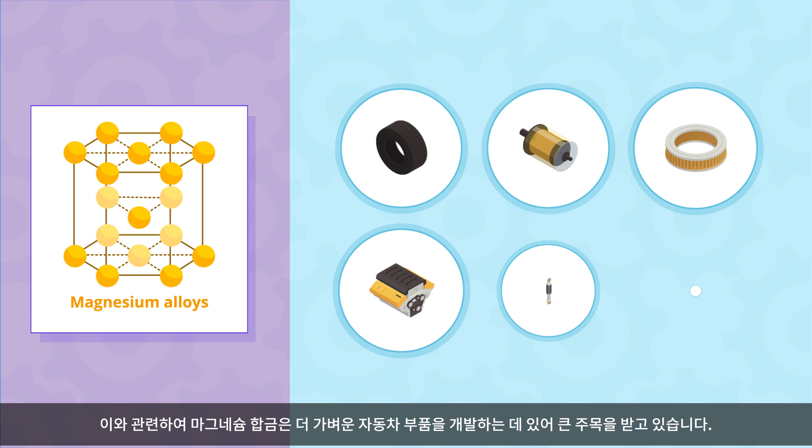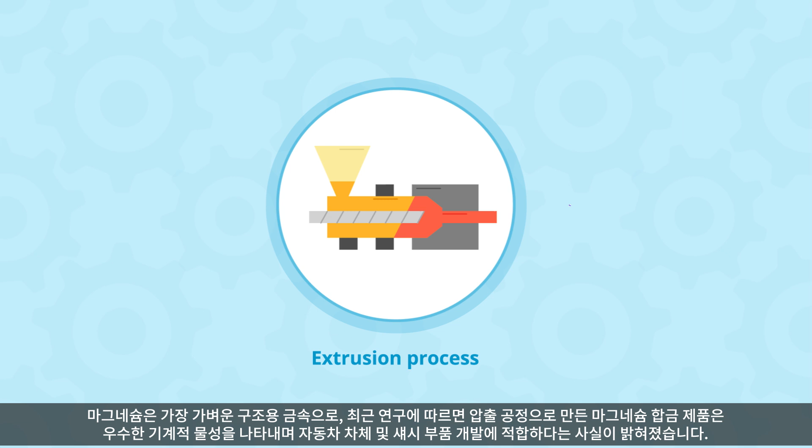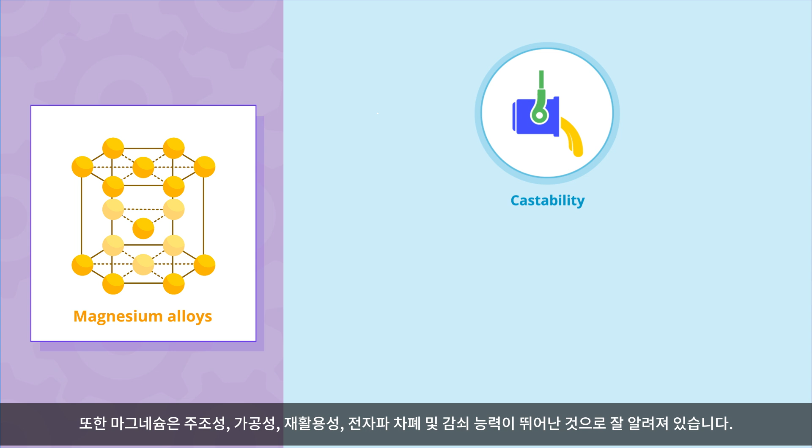In this regard, magnesium alloys have garnered significant attention for developing lighter automobile components. Magnesium is the lightest known structural metal, and recent studies have shown that magnesium alloy products made by the extrusion process exhibit excellent mechanical properties and are suitable for the development of automobile body and chassis components. Moreover, magnesium is renowned for its excellent castability, machinability, recyclability, electromagnetic shielding, and damping capacity.

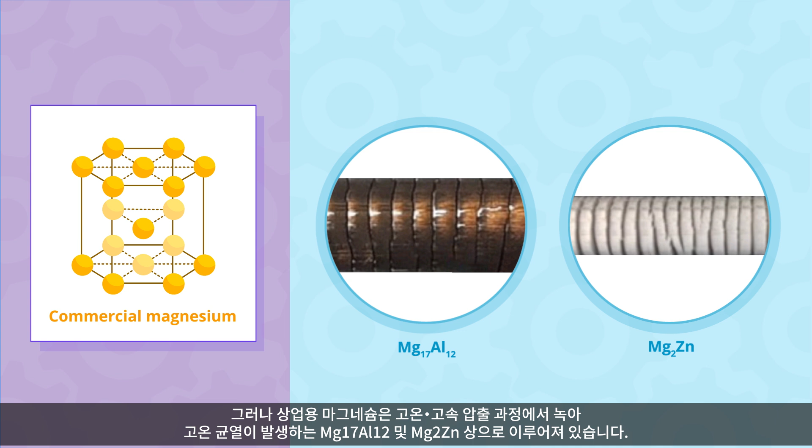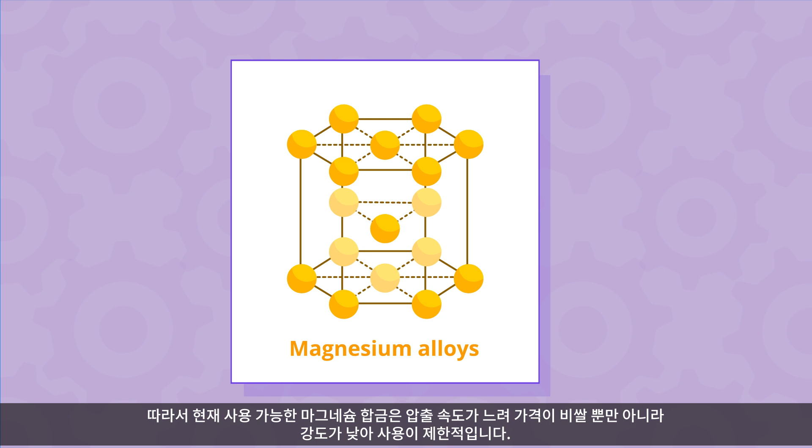However, commercial magnesium has Mg17Al12 and Mg2Zn phases, whose melting during high-temperature, high-speed extrusion leads to the formation of hot cracks. As a result, currently available magnesium alloys are not only expensive due to their slow extrusion speed, but also find limited use due to their low strength.

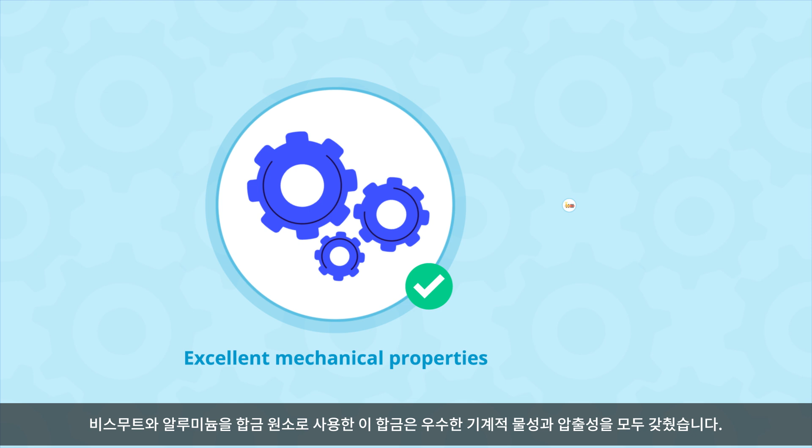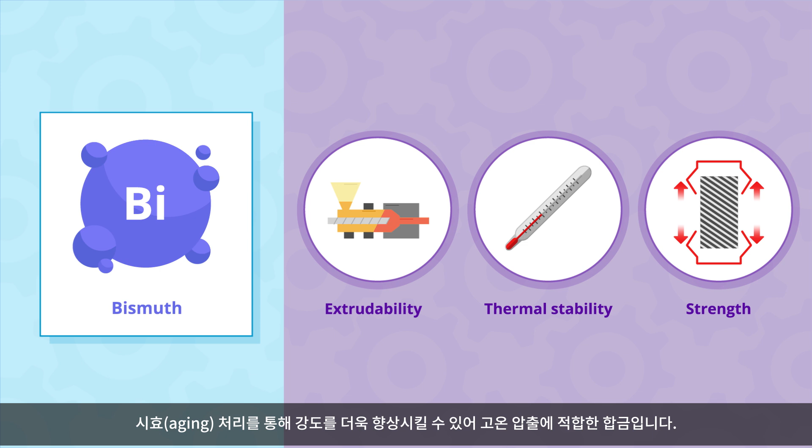To address this, researchers from Kyungpook National University Industry Academic Cooperation Foundation have presented a novel BA56 magnesium alloy. This alloy, with bismuth and aluminum as alloying elements, offers both excellent mechanical properties and extrudability. Bismuth is a key element that thermally stabilizes materials and can improve extrudability and further improve strength through aging treatment, making the alloy suitable for high-temperature extrusion.

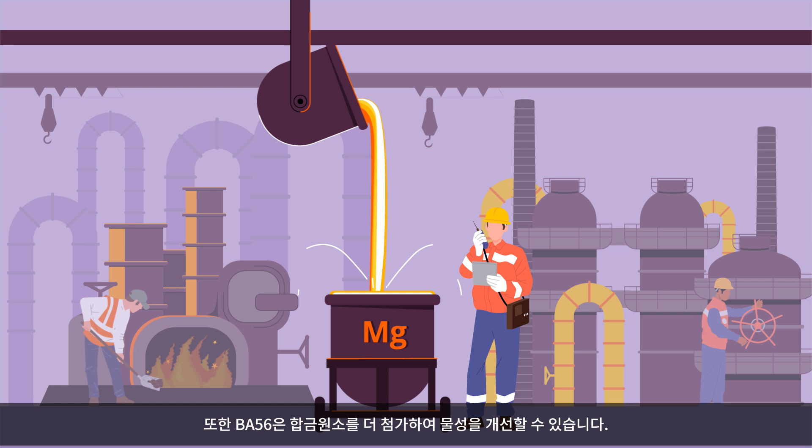Aluminum enhances the mechanical properties of magnesium alloys through solid solution strengthening. Additionally, BA56 allows the incorporation of one more alloying element to improve properties. Manganese can provide increased corrosion resistance, and zinc can further improve the mechanical strength.

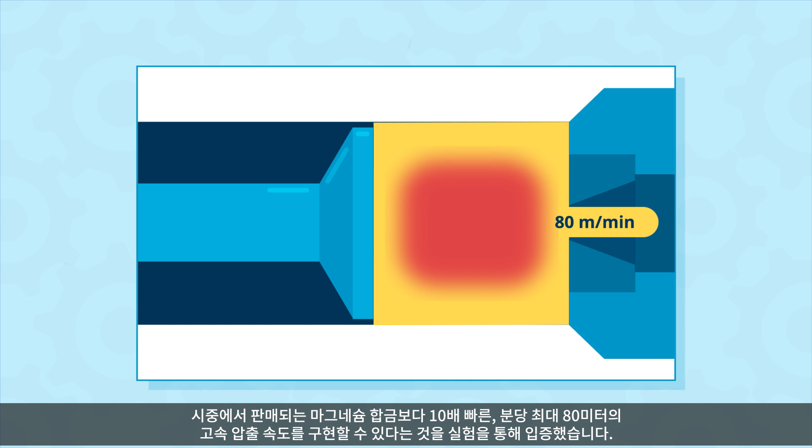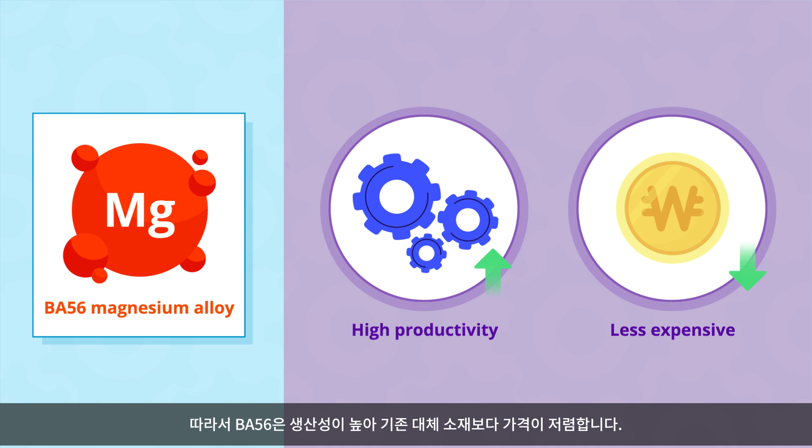The BA56 magnesium alloy can be extruded at high temperatures of up to 450 degrees Celsius without hot cracking and at high extrusion speeds of up to 80 meters per minute, 10 times faster than commercially available magnesium alloys. Therefore, BA56 has high productivity, making it less expensive than existing alternatives. This groundbreaking material can be applied to various forms of mobility, reducing exhaust emissions and paving the way for a greener and cleaner future.